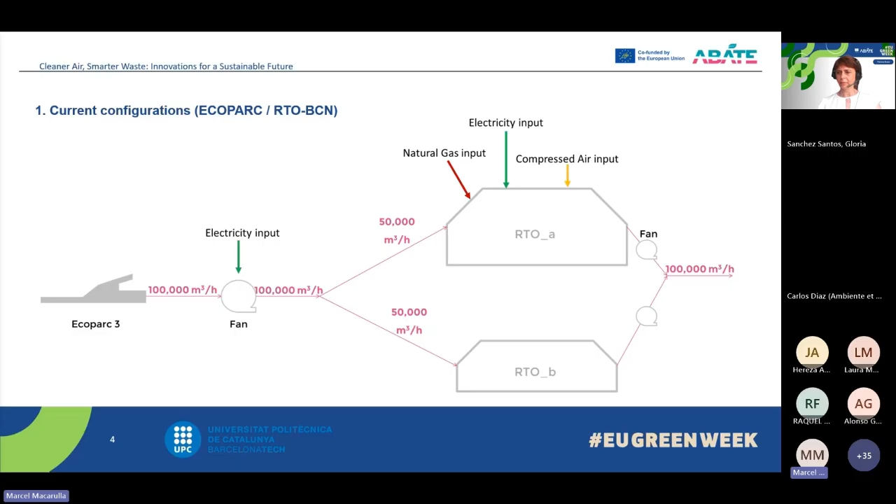This is the Las Dehesas biofilter that my colleague just explained, so I will not explain it again. Here what we are using is natural gas, electric input, water input, and fungicides, and then the electricity input.

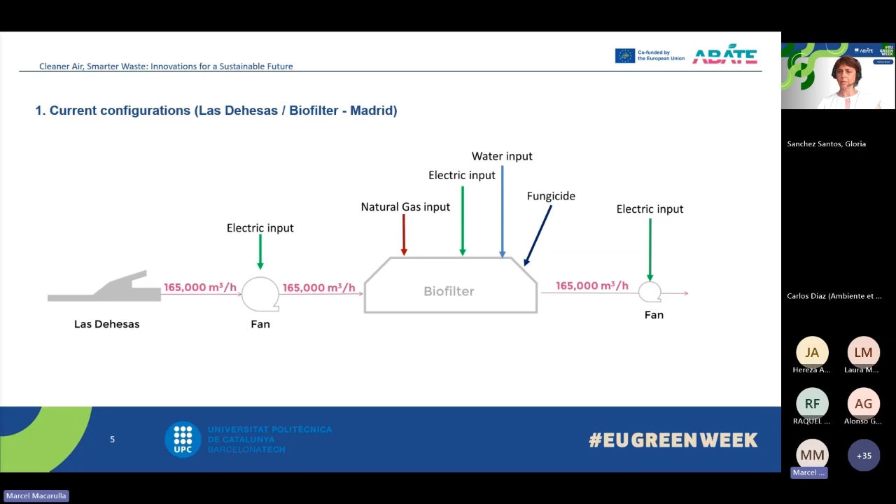Then which are the solutions that we propose? The idea here is to take the air from our installations, put it in a roto concentration, just to treat less air than we are doing right now, and then treat it with a regenerative thermal oxidation, and then put it in the greenhouse.

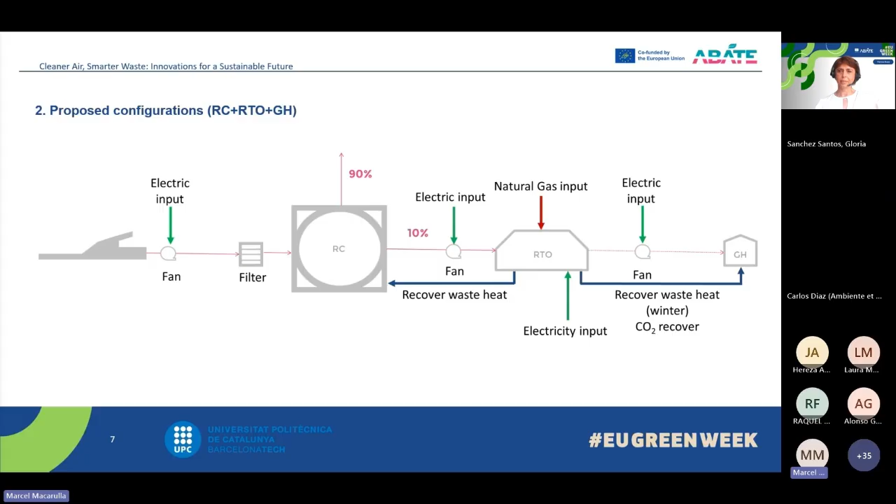Here the idea is that the regenerative thermal oxidation is sending the concentration, recovering waste heat from the RTO, and the greenhouse is recovering the waste heat and also the CO2 of the whole system.

And then here is our system, a pilot plant. The idea is we will treat 20,000; 2,000 will go through the RTO and then to the greenhouse, and then we have 18,000 that is going to the exterior. This is a pilot plant.

Then to avoid odors, we will put this again, just to be sure that the roto concentration is gathering or catching all the odors. We are putting this air inside our installations just to be sure that the odors are completely removed.

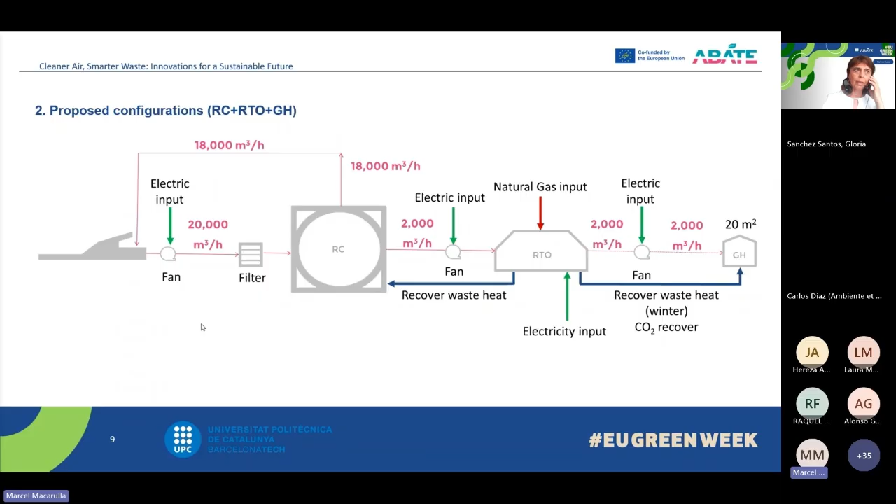In the case of the biofilter, this is the scenario. The idea is the same: with the roto concentration we treat less air, and then with electricity, water, and silicone oil, what we are doing is treating the air and then putting it inside the greenhouse. Here the idea is to recover the waste heat in winter and to recover the CO2.

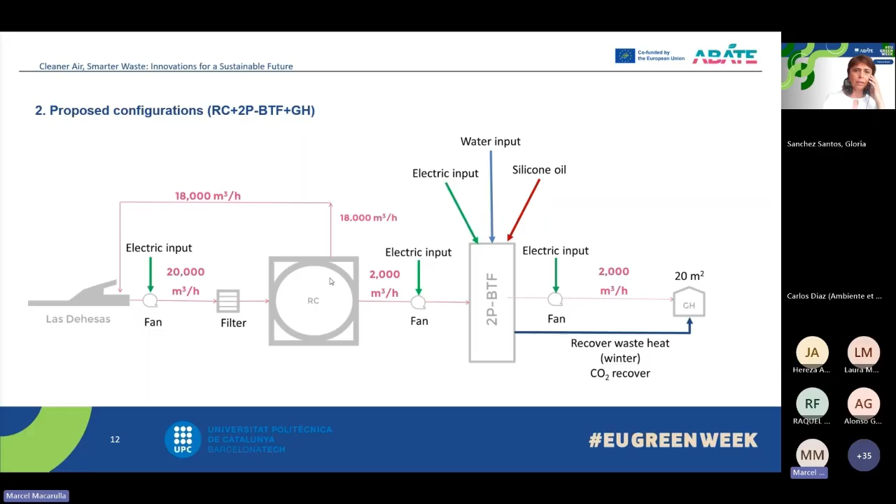Again, what we are doing here is making sure we are not putting volatile components in the air. We are reusing the air going outside the roto concentration, putting it inside the facility again, to be sure we are not throwing odors to the external part of the building.

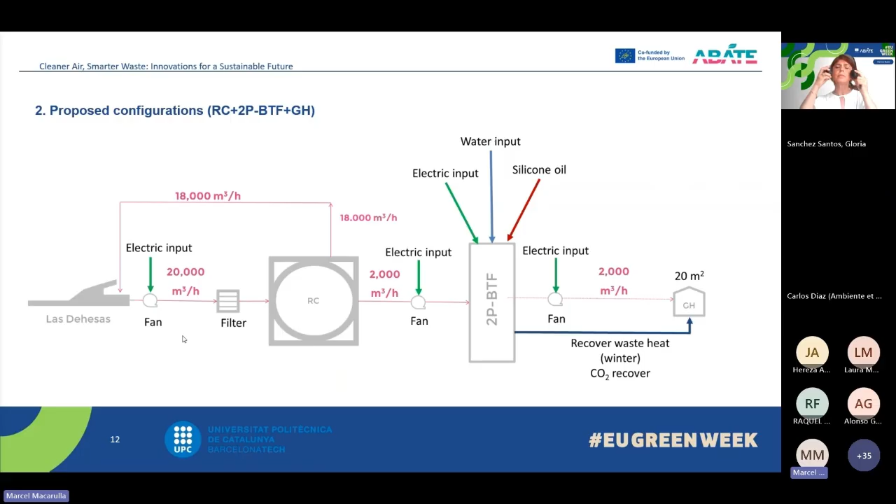Then the LCA modeling: these are the configurations that we analyzed - the Ecoparc plus the RTO, Las Dehesas with the biofilter, and then the roto concentration, the RTO, and the greenhouse, and the roto concentration with the two-phase biotrickling and the greenhouse.

Here, what you have to notice is that in the Ecoparc we didn't put the greenhouse, and in Las Dehesas we didn't put the greenhouse, and as you will see, the results are a little bit strange. But the point is that here is a pilot, and probably here we should plan which is a typical greenhouse that we can reuse.

Okay, then I will explain how we did this extrapolation. We focused on the operational phase of the technologies, mainly on the energy consumption and the rest of the things. We considered a continuous operation of 24 hours a day and an expected lifetime of 25 years. We declared the functional unit is 1 normalized meter cubed per hour of treated gas.

But you will see in my last slide that this is a little bit tricky, because at the end we have two functional units. We are treating the air, but at the same time we are producing food or crops, and this is something that we have to analyze in the future. Right now, without knowing which crop we have to use, and if this crop can be consumed or not, the analysis changes.

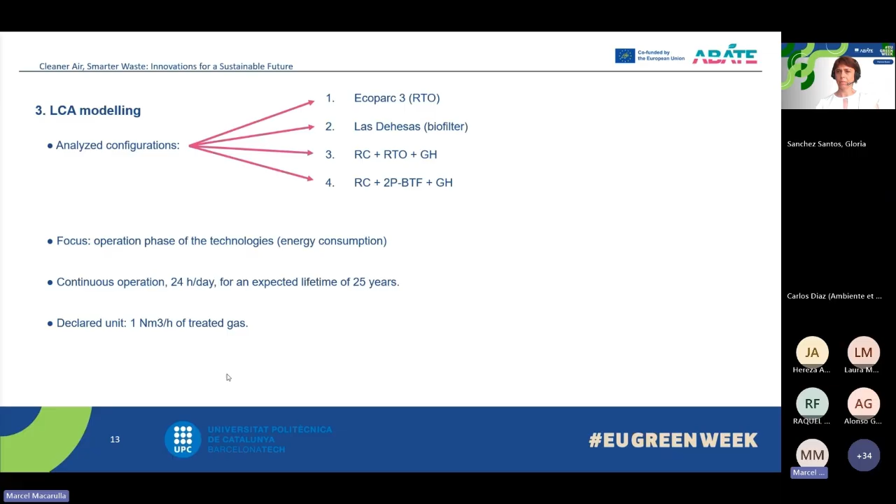We have a problem of scalability, because we don't know exactly which are the costs of our system if they work in a bigger system. Right now the calculus are done: the RTO, the Ecoparc, and Las Dehesas with real data, and these two are done with the pilot plant.

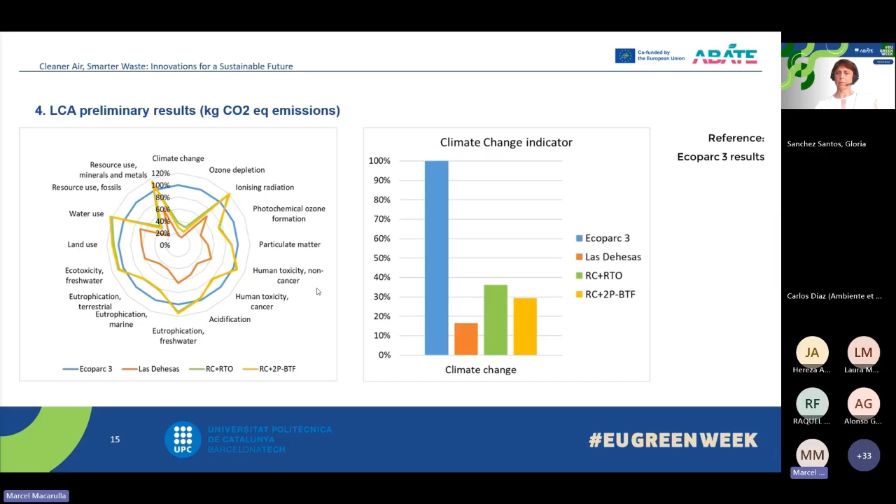But we expect, as my colleagues explained before, that when we can normalize the values or obtain better estimations of the calculus with the real data we consume here, we can reduce the climate change impact and the rest of the impacts.

Then, if we talk about energy efficiency, you see here the kilowatts hour per normalized meter cubic, and these are for the old configurations. However, to compare, we need to add a greenhouse to the baseline scenarios, and we considered that in the Mediterranean area, if you want to heat a greenhouse, you need at least 381 kilowatts hour per square meter per year.

Okay, then if we want to do an estimation of the energy savings of the whole system, we have to consider the Ecoparc with the greenhouse, Las Dehesas with the greenhouse, and then our systems with the greenhouse. If you see here, we are recovering waste heat generated in Ecoparc and Las Dehesas, and this helps us to avoid the energy consumption on this potential greenhouse, a 7,000 greenhouse for this volume of air treated. If you see here, the reduction in terms of energy is very high.

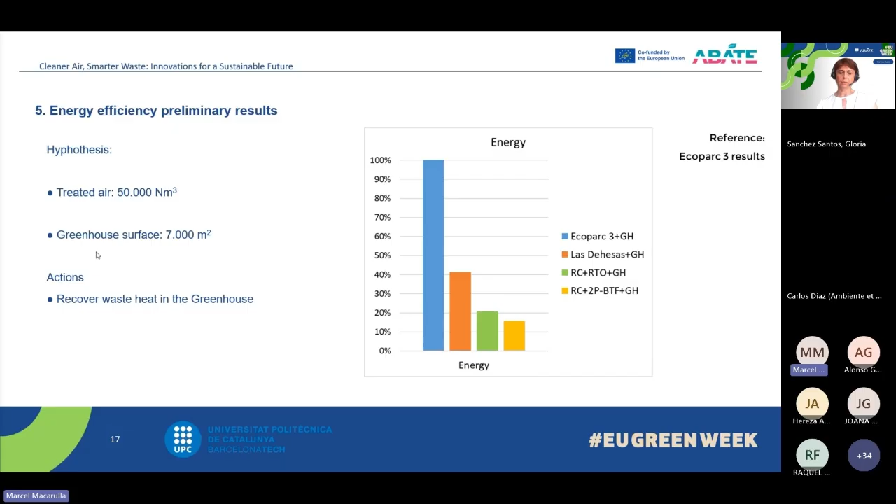If we talk about the cost savings, here it's a matter of which energy you use. If you use more electricity, the costs are higher than if you are using gas. I took these two costs from the last report from Red Eléctrica, which says that in Spain the average cost for industry is 0.10 euros per kilowatt, and the gas is 0.04 euros per kilowatt. But of course this cost should be taken carefully, because it depends on market situation.

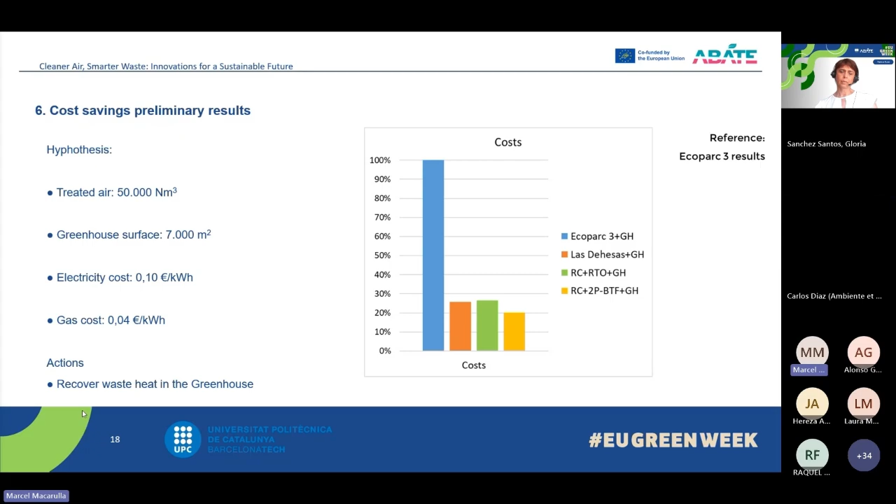And here the actions that we are doing also involve recovering the waste heat in the greenhouse.

If we talk about the preliminary conclusions, first of all we have to say that the estimations are still preliminary, and the results can vary along the project. You have to consider that the estimations of Las Dehesas and Ecoparc were very easy to do, because we have all the information from our colleagues.

All of them provided us all the operational data that we need, and this data is there, no discussion. However, for our pilot plan, we have small equipment, and we have the problem of scalability, and this is penalizing our estimations, but we have to find a way to compensate that. At this stage, we only considered the operational phase, because we don't know the impact of building a new regenerative thermal oxidation plant or a new biofilter. But this is something we have to do in the next steps of the project.

Here we see that Las Dehesas is the one with low impacts in all categories, but the problem is which are the viable crops that you can grow, because if you can grow crops, then you have two functional units, and the results will be much better. Abate solutions ensure a reduction of all impacts in all categories, especially in climate change. The reductions are expected to be even more significant once the project is scaled up, and when we know if we can reuse the crops inside the greenhouse or not.